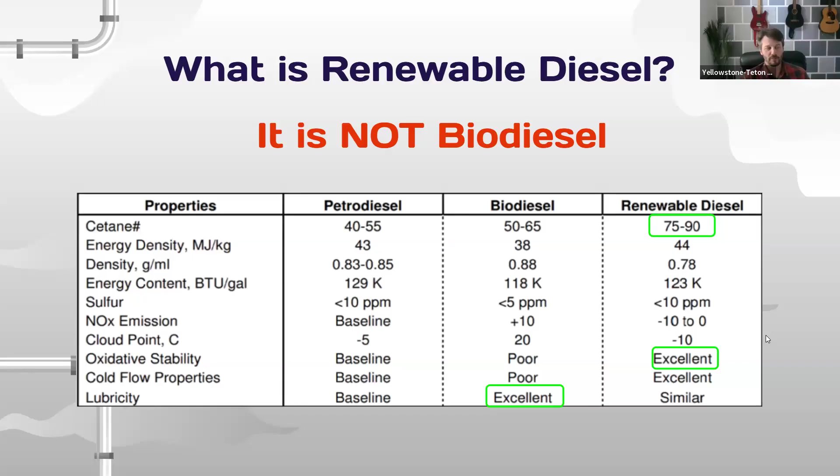This is almost every talk I have, that renewable diesel is not biodiesel, and I offer some comparisons here. Specifically, and I guess most prominent that I always mention, is the cetane value of renewable diesel versus petroleum diesel. The completion, or the thoroughness of combustion, can be sort of related to the cetane number, and renewable diesel has a much higher cetane, so it burns more completely than petroleum diesel. Also, the stability of renewable diesel is much greater than petrodiesel. So those are 2 of the big, aside from the environmental aspects, those are 2 of the big properties I think that are superior for renewable diesel.

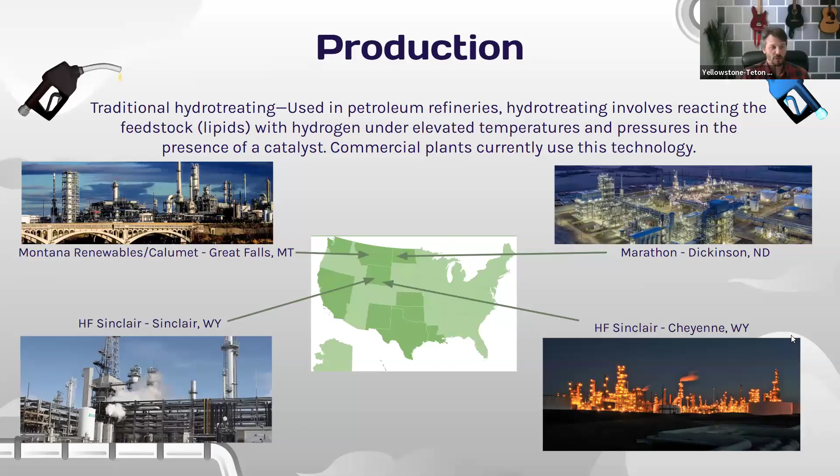Again, in our region we have 4 refineries. We have 1 in Great Falls, there's 1 in North Dakota, and there are 2 in Wyoming. The 1 in Great Falls, which is Montana Renewables, opened in late 2022. This is a slide from back then, and I'm trying to just illustrate that they essentially cut the production in half and continued to do petroleum products, and the other half is now renewable products.

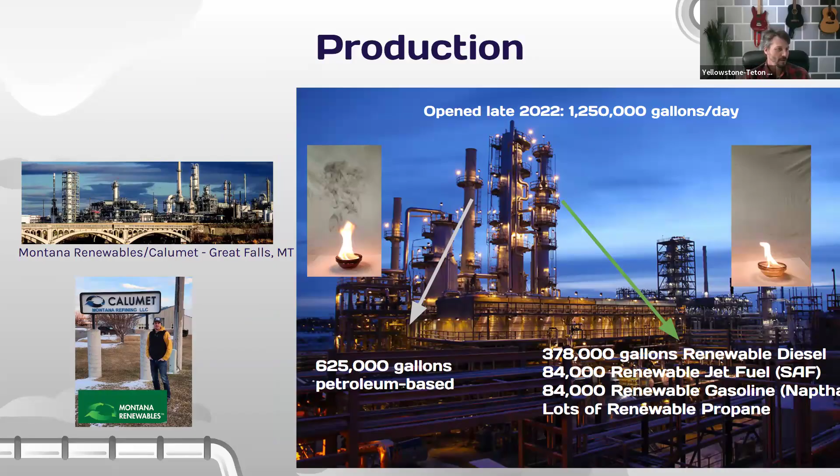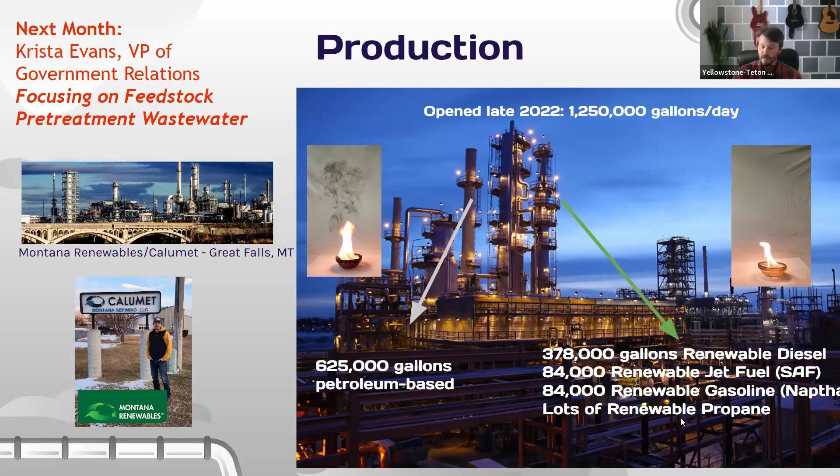And Krista's on this call, and we're talking about having her possibly give a presentation next month on whatever she wants really, but with a little bit of a focus on the wastewater production from pretreatment of the oils. It's been a concern in Montana, and I think we can help clarify and get some information out there to help everybody better understand it. We spoke on the phone yesterday for almost an hour, and I learned a bunch of things that I didn't know, so I think we'll all learn something.

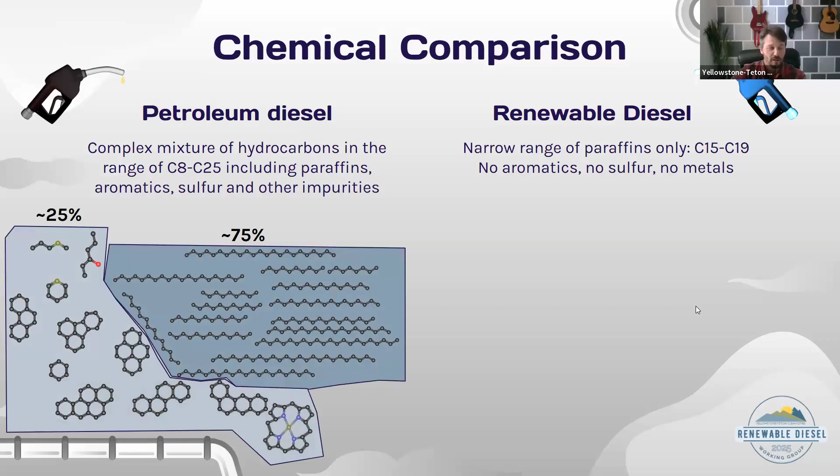Quickly, just chemically, the difference between renewable and petroleum diesel. Petroleum diesel is a complex mixture of a bunch of different hydrocarbons, and I represent that with these different molecules, aromatic hydrocarbons. There's some metals in petroleum diesel. 25% of the makeup of petroleum diesel are these aromatic or metal-containing compounds, and maybe 3/4 are linear hydrocarbons.

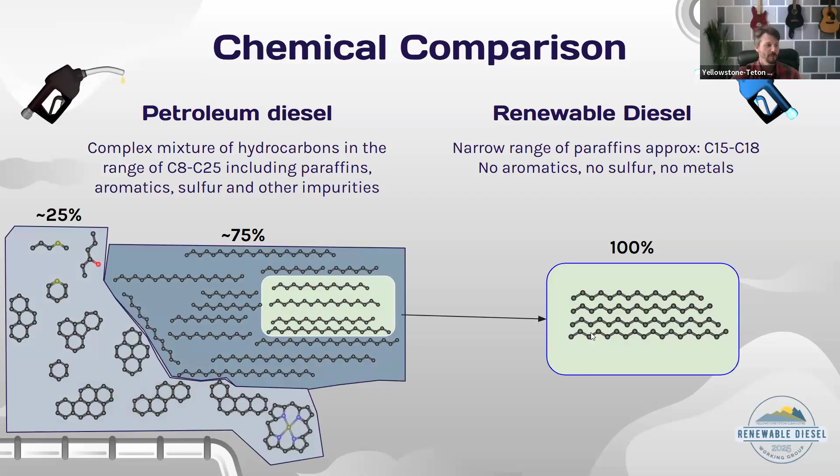Renewable diesel is essentially a subset of these molecules. It's a very narrow range of these linear hydrocarbons. They could be branched, I'm just trying to represent them here. So you could almost say renewable diesel is petroleum diesel, because it's essentially contained within the makeup of petroleum diesel.

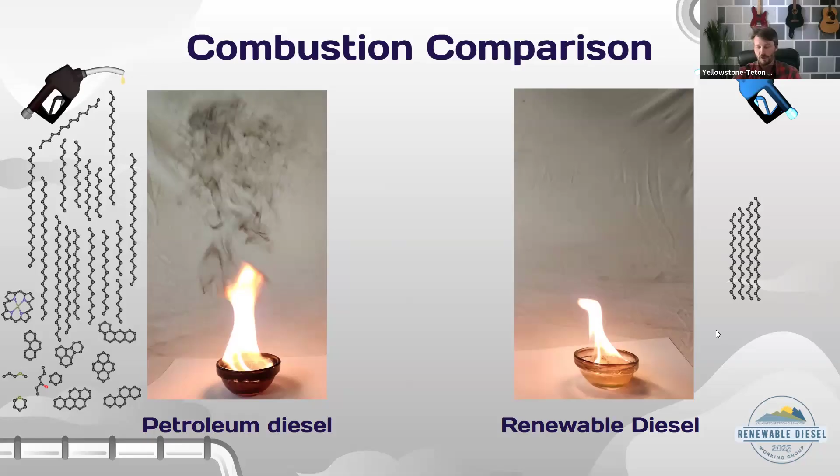So it burns clean as well. There are a lot of benefits to renewable diesel in terms of maintenance of your vehicles. This can be found on our YouTube page.

Their fuel filters in the vehicles and the tanks are lasting longer. He said he's seen more power and cleaner injectors. On average, that equates to about 5 hours of maintenance per vehicle per month, so it was a huge benefit for him. You can hear him say all this if you go to our YouTube page.

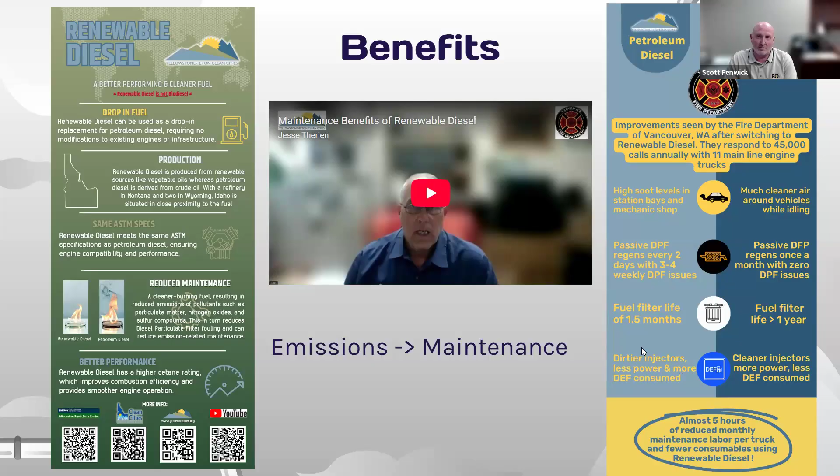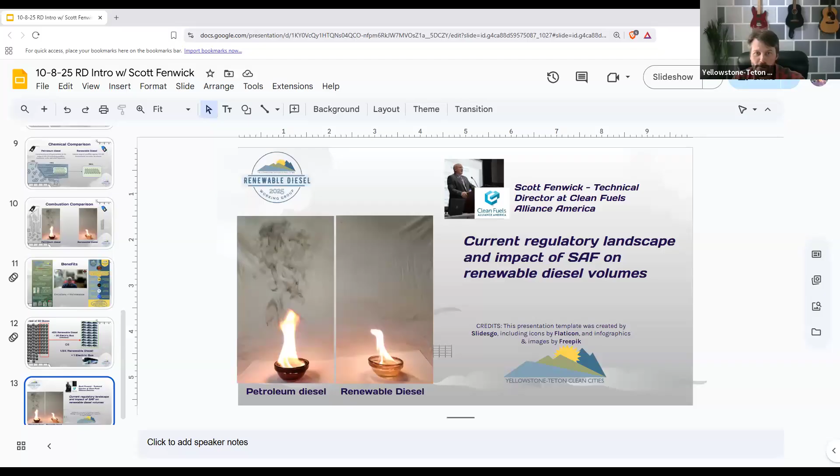Perfect, appreciate it Jesse. Good afternoon everybody, my name is Scott Fenwick. As Jesse said, I work as the technical director for an organization, Clean Fuels Alliance America. We are the domestic trade association for renewable biomass-based diesel fuels. Our stakeholders, our members, represent biodiesel, renewable diesel, and now sustainable aviation fuels as well. As technical director, I work pretty closely not just with our member organizations, renewable fuel producers, but also the petroleum industry.

I've been in the fuels business, a petroleum chemist in the Gulf Coast originally, for over 35 years. I've worked just about every aspect of the fuels industry you can think of, from production, working in refineries, managing laboratories, in the distribution side, in charge of rail and truck distribution for a producer organization in North and South America, and then joined what is now Clean Fuels Alliance America, formerly the National Biodiesel Board, about 13 years ago. I also had the privilege of serving as the recent past chair of ASTM Committee D2. ASTM is an international standards development organization, and Committee D2 covers petroleum products, liquid fuels, and lubricants.

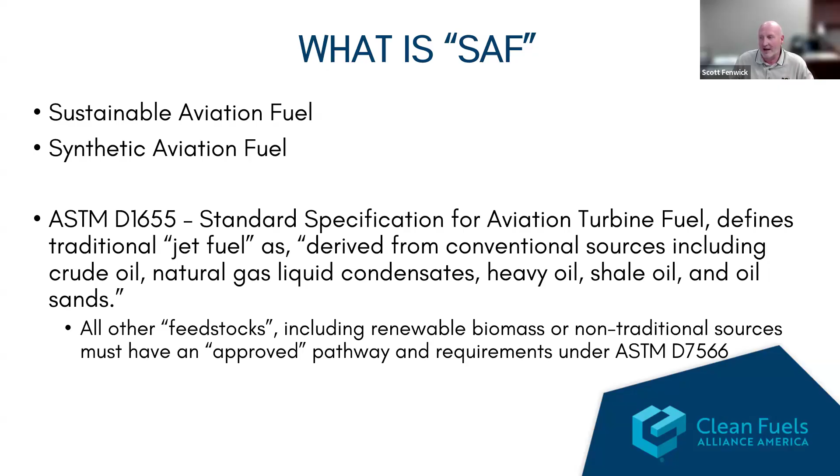The previous administration here in the US did define it as sustainable aviation fuel. This current administration changed that definition, that acronym, to now be synthetic. And as I mentioned, to be sustainable, there is a regulatory requirement that you reduce greenhouse gas emissions by at least 50%. Those are calculated using life cycle analysis, and everybody refers to it as the GREET model here in the US, developed by Argonne National Lab.

So you may hear the acronyms as well, in addition to SAF, SATF for synthetic or sustainable aviation turbine fuel, renewable jet fuel - all the same. Here's one bullet point that I hadn't yet finished working on with a colleague of mine here in Clean Fuels, Veronica Bradley, who does our environmental sciences work.

Because there are multiple different kinds of SAF, we want to talk about HEFA. What the industry calls that is hydroprocessed esters and fatty acids. It is the most common, the only commercially available SAF in the marketplace today. Basically it means sustainable aviation fuel made from commercial fats and oils - so vegetable oils, animal fats, used cooking oil and such.

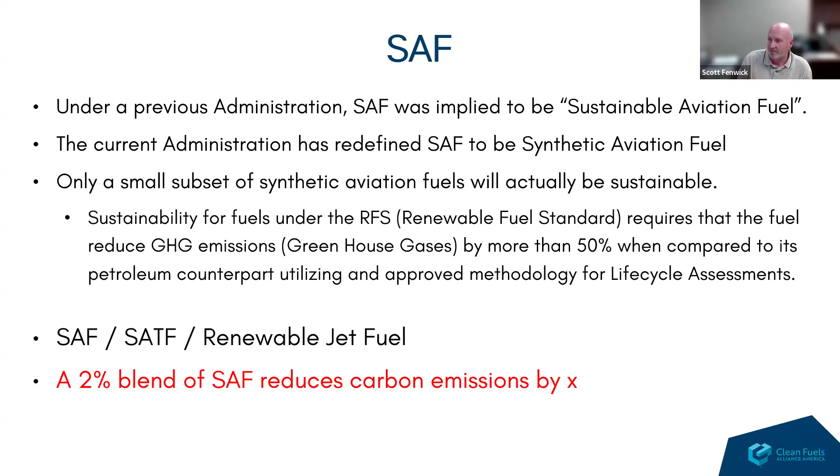But back to ASTM and D1655, these are the characteristics of how ASTM governs and defines performance parameters within their standards. These are the types of parameters and concerns that the aviation community has when developing specifications.

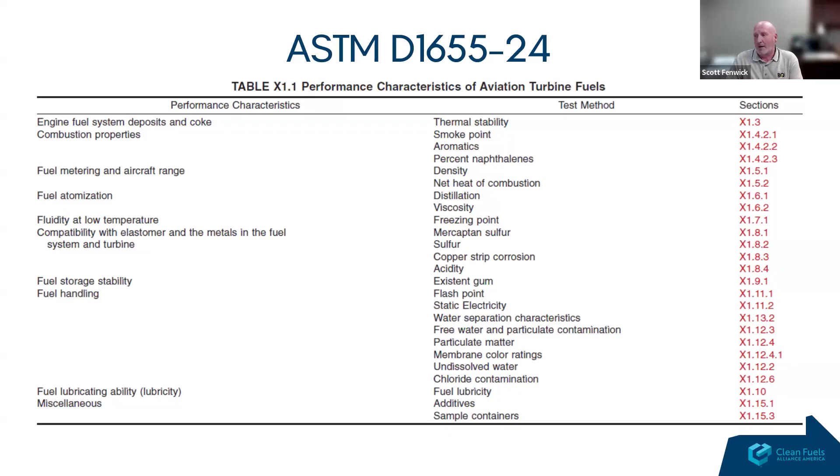So whether or not you're an airframe manufacturer, a company like Boeing, an engine manufacturer such as GE or Rolls-Royce, whether or not you're an airline - United, Southwest - foreign companies, foreign governments, all of these types of companies participate at ASTM and play a role in developing the limits and parameters that we discuss as part of these specifications.

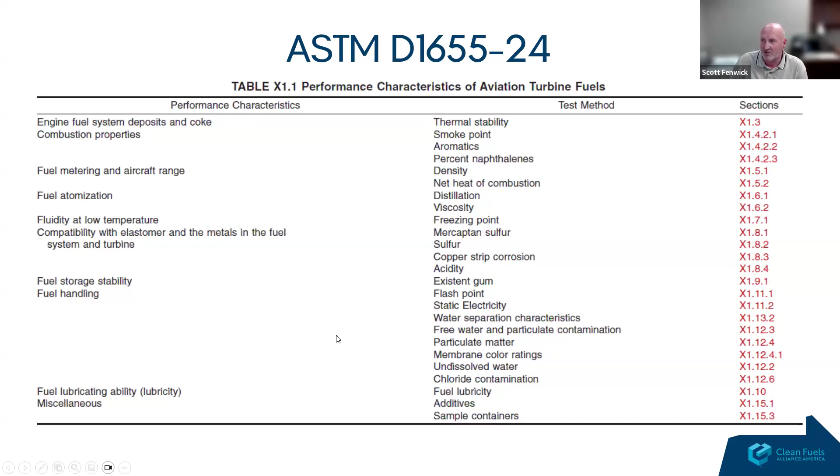D7566 is the specification for synthetic aviation fuels. Currently, there are 8 approved pathways, which are different annexes in that standard, where each is unique to a production facility with unique characteristics, unique feedstocks. I mentioned HEFA - those hydroprocessed esters and fatty acids utilize veg oils and animal fats. There are other annexes for Fischer-Tropsch, again coal to aviation fuel. We can use woody biomass.

From a technical standpoint, we are at a point where nothing is impossible. We can literally take carbon dioxide out of the air, condense it, and convert it into a liquid renewable fuel. So the issue with that is the technologies to do all of that today aren't competitive with petroleum liquid fuels. A lot of research is still ongoing about ways to reduce those costs.

Like I say, there are 8 current approved pathways, but as of today, there's really only one of those 8 types that has any commercial volumes. Each one has its own spec, and each one of those specifications has a maximum allowable blending limit. So none of these annexes or fuels produced to these annexes can be used as a 100% substitute - every one of them is required to be blended with a petroleum aviation fuel.

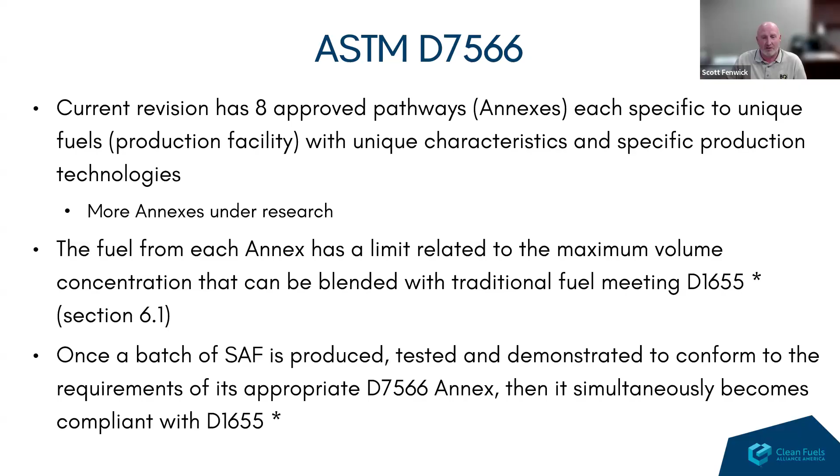Right now the maximum allowable would be 50%, so that once it's recertified, it can then be blended and used in an airline. Once it is blended, it's tested to conform to its own annex, its own limits. Once it's certified, then it automatically becomes D1655 compliant as well. And then you can blend it further and further downstream, so long as you maintain those limits.

Again, aviation fuels and synthetic aviation fuels are all designed to be hydrocarbons, so no oxygenates, no additional compounds. They've got to meet those same performance criteria. So at 38,000 feet, if you're flying across the Atlantic Ocean, it's pretty cold, and you need a fuel that can perform to minus 60 degrees. There are liquid fuels that cannot perform at those temperatures. A lot of these parameters, a lot of these limits, take those considerations and specific applications into account.

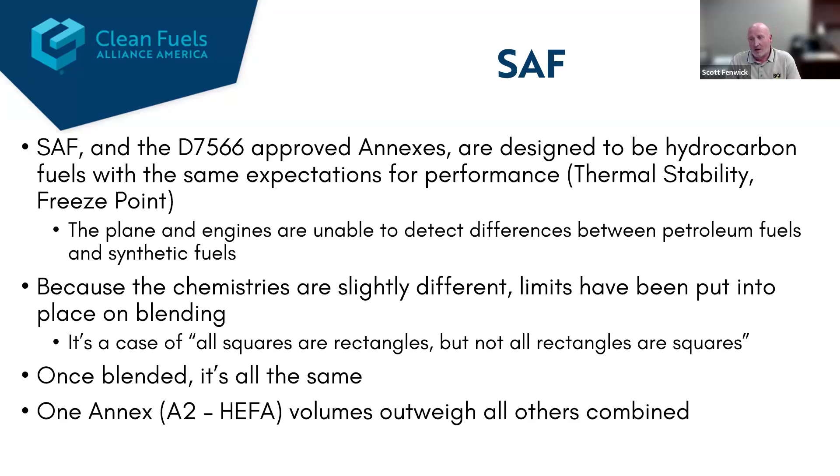Chemistries are different, and so once these fuels are blended, it is practically impossible to separate them and easily identify how much of that component was synthetic versus how much was petroleum-based. In fact, the only way to determine, once it's already been blended, how much of a synthetic component—really it's more of a sustainable component—is through carbon dating, radiocarbon dating, just like you would do with fossils today.

There are a couple of labs. The lab that developed that process is down in Miami, Florida. Clean Fuels works very closely with them, Beta Analytic. We do a lot of work on samples across the country, samples that we get from around the world, to determine what they call the biogenic, or renewable fraction component.

So it's that age-old premise: yes, it's a hydrocarbon. All squares are rectangles, but not all rectangles are squares. Just because it's a hydrocarbon doesn't make it suitable for use necessarily as a 100% substitute. Annex A2 in 7566, that HEFA process, is the only one commercially available today. It beats all other commercial volumes from all 7 other annexes combined.

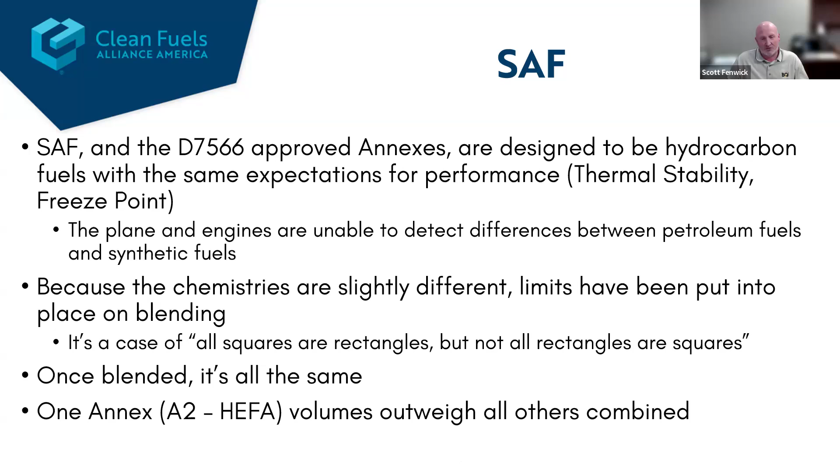Talk a little bit about ASTM. Subcommittee D02.J, which covers aviation fuel, currently has over 800 members from all over the world. In fact, the last meeting I attended was earlier this year in Brussels—an international meeting. A lot of the members there were talking specifically about SAF and policies.

These are the technical considerations. Above and beyond the technical considerations, you've got regulatory adoption and different policies that come into play as well. In Europe, there's what they call the Renewable Energy Directive, or RED—they've got RED 2, RED 3 directives at this point. In the US, we have the Renewable Fuel Standard, or RFS. The interesting thing about the US is that synthetic or sustainable aviation fuels are not a mandated fuel. They are not currently part of the RFS, so there are no mandates, no requirements to use them. Europe has adjusted their policies and earlier this year began incorporating a mandate.

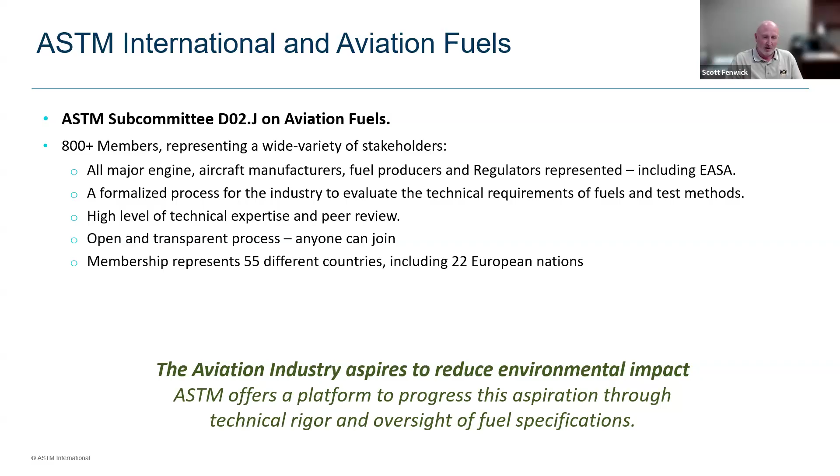So this year, 2% of all the aviation fuel consumed throughout Europe must be a synthetic or sustainable aviation fuel, and over the next several years they will increase that percentage accordingly. ASTM doesn't play a role in enforcement of this—it's a consensus organization where stakeholders and experts come together to agree upon the technical requirements. But a lot of it has a different aspect throughout the industry.

So who oversees all this? Industry covers fuel specification. Industry covers the infrastructure, the pipelines, how the fuels are moved and distributed throughout the industry. Industry covers the test methods through ASTM—how are we going to measure these properties, what are the limits going to be. The limits would be the specification compliance. That's all up to industry to develop, whether or not a fuel is what we define as fit for purpose. Certain applications require certain fuels with different parameters.

The one thing outside of this is how this works as an operating limitation within the industry, and that's covered by regulatory authorities such as the FAA. In Europe, their equivalent to the FAA is an organization called EASA. Those are the regulatory bodies that step in and mandate that ASTM standards must be used—ASTM test methods, ASTM specs, and whatever else they deem worthwhile. So currently, FAA mandates on a worldwide basis that any fuel put into that airframe, into those engines, must meet ASTM D1655. That's why it's so difficult to create new fuels and new limits.

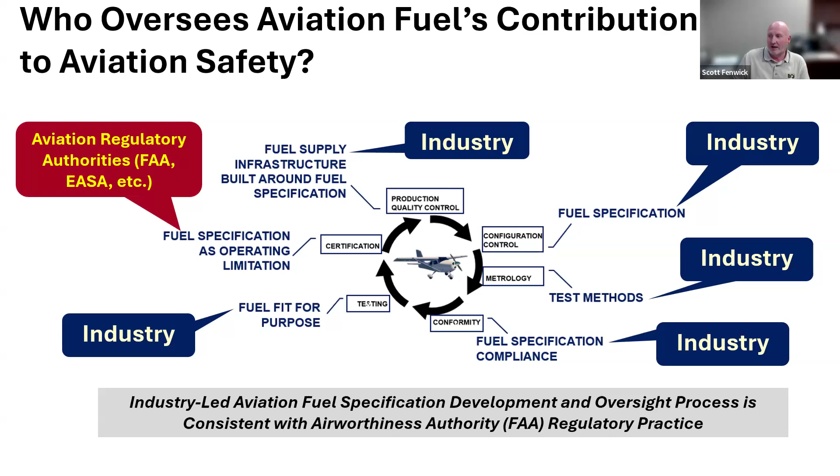Production of SAF, again, volumes haven't really kicked off. It's not necessarily a technical issue, although there aren't very many production facilities that have been built. We've seen renewable fuels go through stages where 20 years ago, we saw a boom in biodiesel production facilities.

About 5 or 6 years ago, we saw a boom in renewable diesel production facilities being built. It's really only been here in the last year or two. Jesse talked about those - you've got Montana Renewables, the Marathon Dickinson refinery that was converted to renewable production, and HF Sinclair has 2 facilities in Wyoming.

Each of those was or is still a petroleum refinery. You cannot produce a synthetic or sustainable aviation fuel outside of those capabilities. So biodiesel producers today can't switch to producing SAF tomorrow. They don't have that infrastructure, that technology to produce it. You need refining capabilities, whether that's a hydrotreater, hydrocracker, or other capabilities, and a lot of hydrogen, high pressure, high temperature reaction vessels.